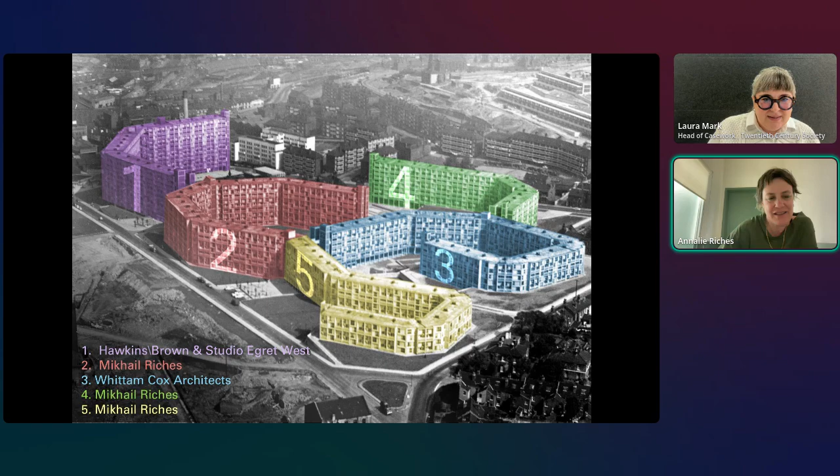So Park Hill Flats was completed in 1961. It was 1,000 homes, I think it's the largest listed building in the UK, or maybe even Europe. And it's been built as a number of phases. Phase 1 by Hawkins Brown and Studio Egret West is very well known and completed, I think it was 2006.

We've done stage 2, which is now finished. Stage 3 by Whittam Cox Architects is student housing. Stage 4 is on site, and stage 5 will hopefully follow. It has planning permission, but with Park Hill, who knows?

It was the first of 4 mega structures that Sheffield City Council built. In a decade, they managed to complete 4,000 homes, and it's the only one that's left. All of them were based on the idea of streets in the sky. So you lift the streets off the ground, and you access either your flat above street or below street, and every single flat is a duplex.

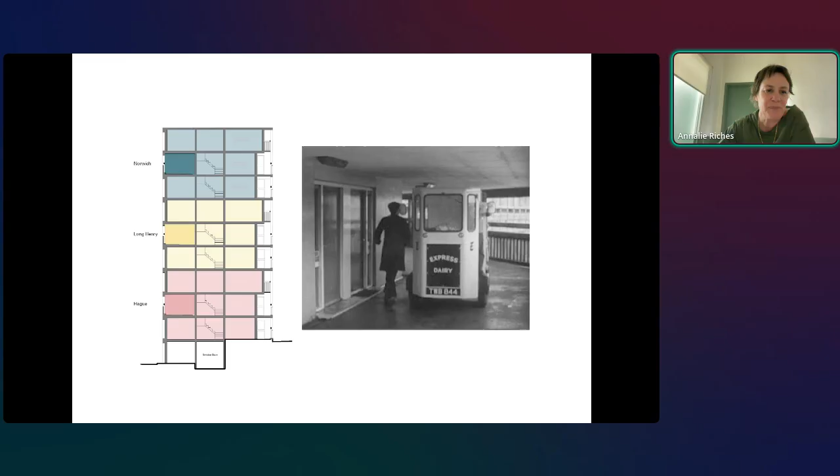They originally, it's quite a British form of brutalism. It's concrete frame with brick infill panels, and the bricks were chosen with an artist and graded in colour up to the sky.

It was hailed a success, much copied, and it remained a success. It had everything you wanted there. It had shops, schools, pubs, a church.

But in the 80s, it started to decline. A lack of maintenance, widespread job losses. There were lots of reasons for its failure, and a lot of people in Sheffield wanted to see it demolished, along with the other 4 projects.

It got listed in 1998, and then Urban Splash won the competition to redevelop it. I probably think they didn't know what they were quite getting into, but it needed a complete facelift, and it needed a new image. And so phase 1 reinvented Park Hill.

It was this shiny new building, and gradually it started filling with new people and businesses. And then when it came to phase 2, they had another competition.

They decided they wanted a lighter touch approach, and they had this really unusual competition in that they gave us the keys to the building, a flat, and told us just to wander around, and then the interviewer's inviting the jury into the flat and showing them what we'd done.

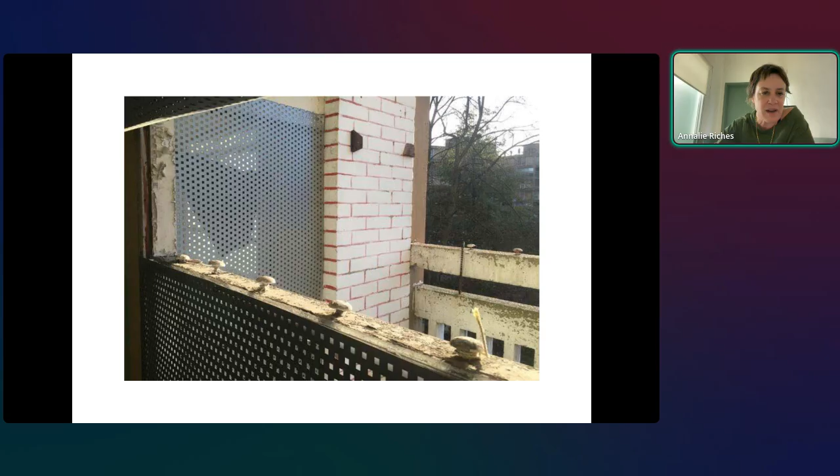And our flat had this white brick where someone had painstakingly painted in all the mortar joints. Another thing we noticed was the bricks were actually in really good condition, which was surprising because the concrete frame was quite severely degraded. And actually it turned out this is because they'd been laid in lime mortar and had been able to move with the building.

So we really wanted to keep the bricks, and actually all we've done is give it a light clean, and we kept the mortar.

We also had the benefits of thermal imaging on phase 1, which showed us where the most problematic cold bridging was, particularly these lateral beams that go into the building. And so if we could insulate those, then we could massively improve the thermal performance.

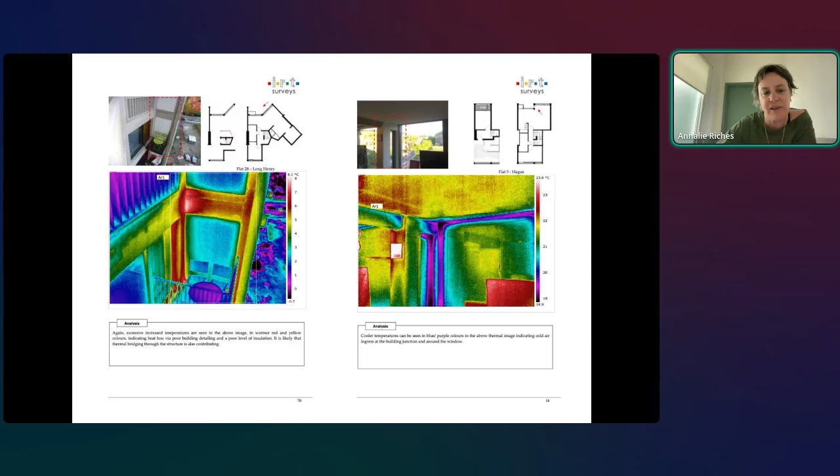And so this led us to develop this idea. We'd keep the bricks on the surface, and we'd insulate and colour these reveals of the flats.

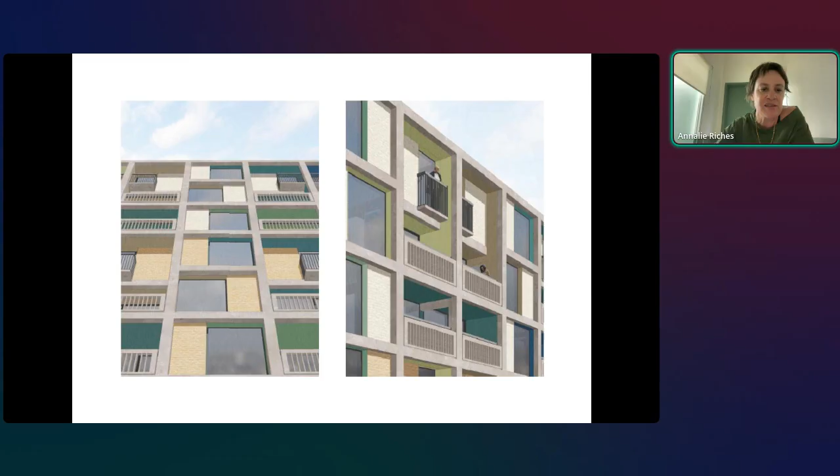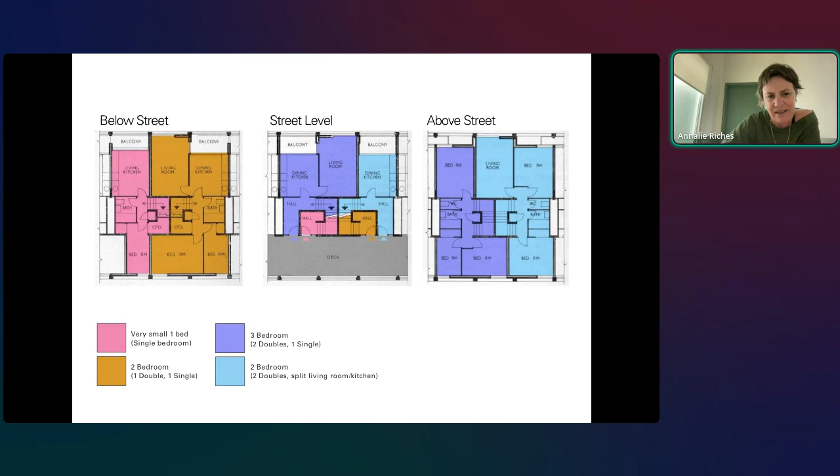We assumed this was a repetitive cluster of flats that would go across the whole building. But when we finally won the competition and got to look at the whole plan, we realized there's no repetitive cluster of flats in this building. It's kind of nuts - there are two different pink flats, and they repeat randomly across the facade. I think this is probably because of the apocryphal story about trying to keep people together as they lifted the flats into the sky, which may perhaps be true, although it's a crazy way to design a building. But I think the strong sense of community there was really important to the architects.

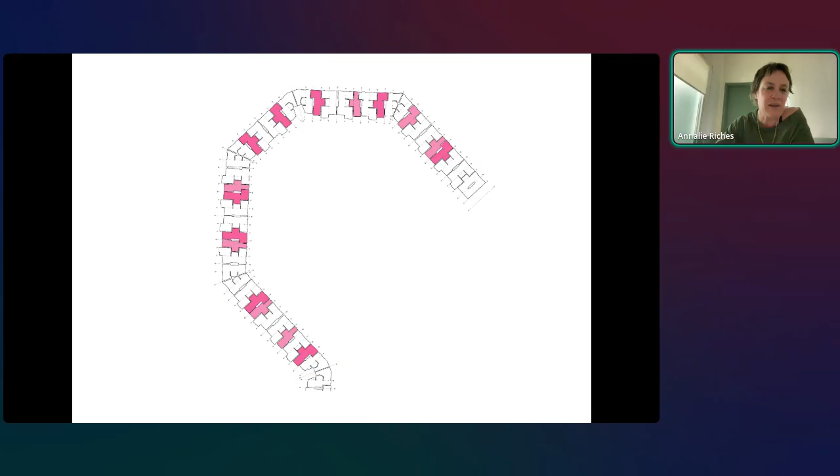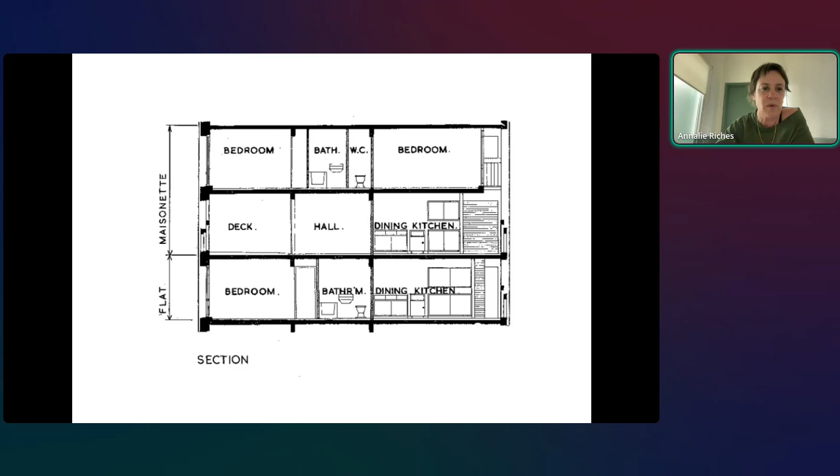It's a tricky building in section because there's very low floor to floor heights - 2515, which is about 0.5 meter less than you'd normally build it. Massive cold bridging. The deck or the street is the biggest problem, but also the facade steps in and out. It's needed a really incremental process to look at where we can add insulation where possible and what compromise we accept in terms of floor to ceiling heights.

The streets are, again, tricky because there's no passive surveillance. They turn blind corners, and we really wanted to improve the feeling of walking along these streets and the sense that there were people living there, which you didn't get. When you look at the old photos, you can see people have customized their thresholds with this lino that everyone put a different lino on.

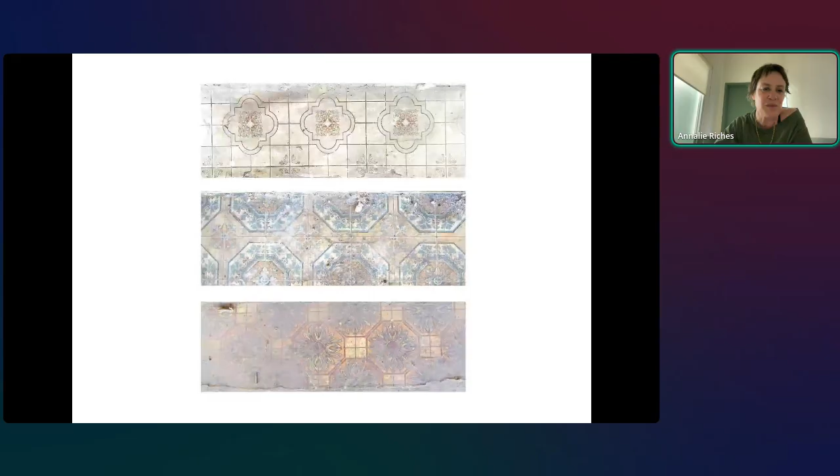And when we looked, they were still there. So we did a lino survey and developed these doormats that we extended a bit further into the street to give people a bit more defensible space, and also to try and discourage people from walking right next to the doors - and at night they're lit.

We really loved phase one, the way they introduced these corner windows to all the below street flats, and people had started to customize them. Apparently one street has a competition for the best Christmas display, and we really wanted to take this idea into phase two and give everyone this space to customize, but also to improve the surveillance onto the street.

So from the outside, this is the street side. The bricks have just had a really simple clean. We've recessed the windows back into the thermal layer to try and give the brick panels the same relevance as the phase one aluminium colored panels.

From the deck side, it looks a bit like our stencil graffiti. From the front, it's kind of cleaned up with new windows. But as you turn the corner, you start to see the different flats within the whole.

The colors on the balcony reveals are reflected in the door colors, and at night these are lit. With the different patterns of the doormats and the door colors, everyone has their own front door - they're all unique.

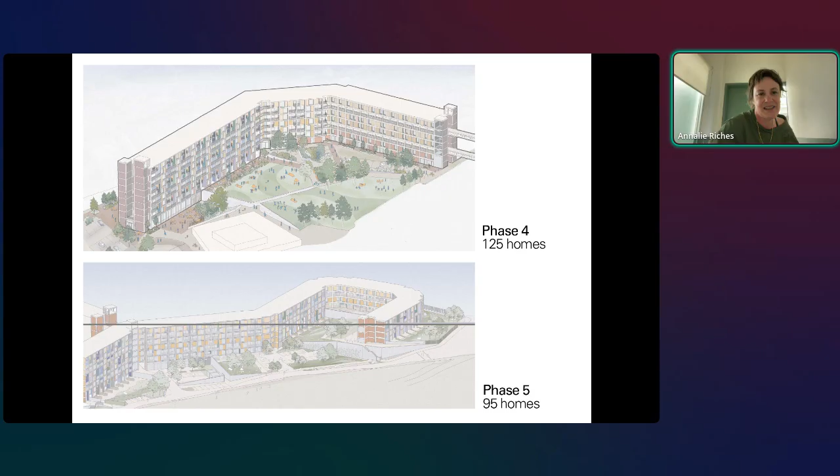In the next phase, phase 4, 125 homes - as I said, it's just started on site. And phase 5 will be a further 95 homes.

I think one of the pleasures of working on a building for a long time is you get to meet the people who live there. There has been quite an extraordinary sense of community that's developed incredibly quickly in phase 2. This offshoot, Concrete Communities, has started to make connections between people that live in these kinds of buildings.

Laura, you're going to tell me I've run out of time? Yep, you guessed it. I was just going to say Park Hill isn't finished. It's 60 years old, hopefully we've had another 60 years. There's still a massive site in the middle, and I sense it's not the end of its story.

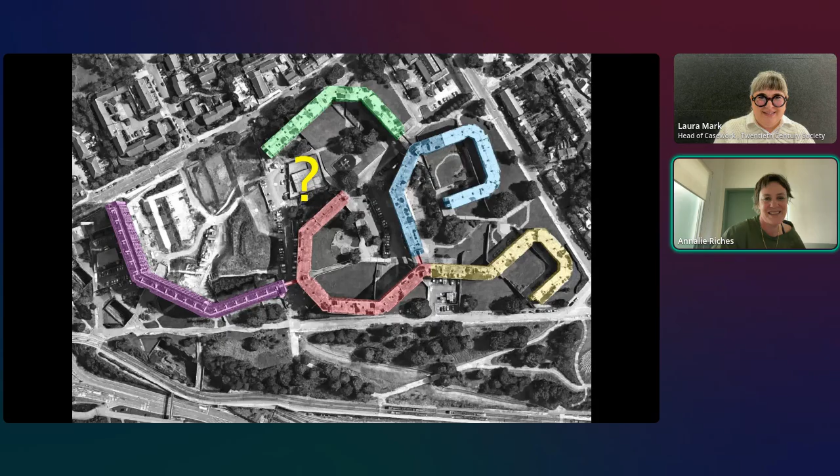Yeah, great. Thanks for a really interesting presentation, Annalie. I love the customization elements. I think that really is Sheffield to a T.

I just wanted to understand, having been part of the tender process, you've lived in the building, whereas I've only visited in the day. So what does it feel like, and how have you worked to make it feel safe approaching what is quite an imposing set of buildings when some are still empty, and how does that work into the phasing and design approach?

Well, we didn't live there. We spent two weeks kind of wandering around, and actually it was built during COVID, which was an absolute nightmare. We had ships stuck in the Suez Canal, I don't know if you remember all that stuff. So our project architect, Alan, went and lived in phase 1 for a month and was on site every day trying to help. It was quite chaotic.

I don't know, I was a student at Sheffield. I've never thought it was a really imposing building. I was indoctrinated to love it. It certainly had, whilst it had its haters, it had people in Sheffield that really did love the building. Yeah, so I don't know, I think it is imposing.

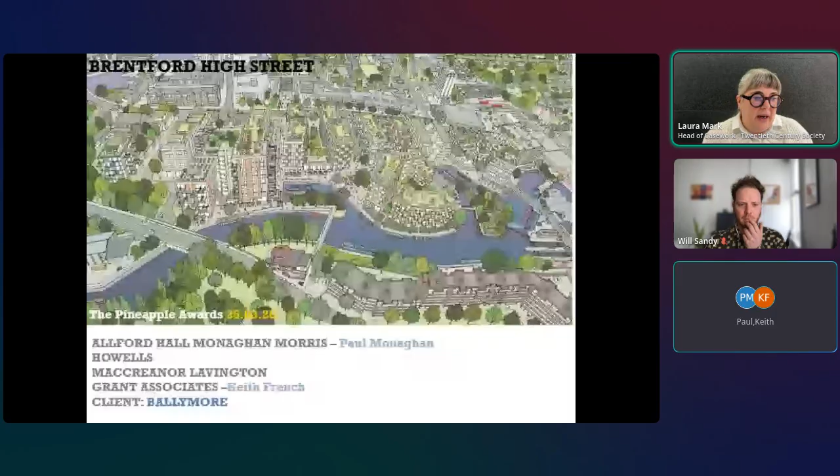So the next project up is the Brentford project in the London Borough of Hounslow for Ballymore, with Allford Hall Monaghan Morris, Howells, Maccreanor Lavington and Grant Associates. This is going to be presented by Paul Monaghan, Executive Director and Head of Design Studio at Allford Hall Monaghan Morris, and also Keith French, Director at Grants.

Thanks, Andrew, do you want me to share that? Sorry, I've got a lot of background noise - I can't hear myself. That's okay, we can hear you. Okay, no, I can't concentrate because there's loads of background noise. Okay, oh, it's gone, alright. Brilliant, you've got 10 minutes then, Paul. Great, thanks a lot, Laura.

What I wanted to say is this is a project that we won in competition as a joint master plan with AHMM, Howells, Maccreanor Lavington and Grant Associates. And we won the project 16 years ago. It took an awfully long time to move on, but this is the aerial view of the overall master plan.

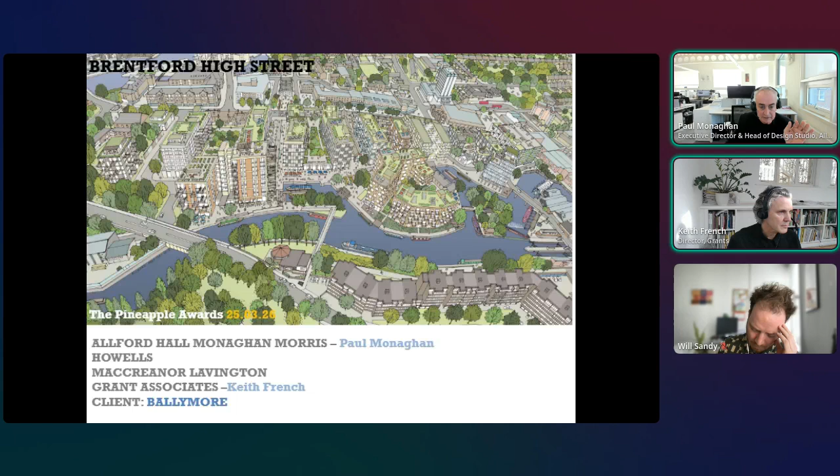The Brentford project is set in the heart of Brentford, just north of Kew Gardens, west of Chelsea. It was a very large site that Ballymore attained, working with Hounslow Council, right on the River Brent - you can see at the bottom - and faced onto the High Street.

Originally, Brentford became quite prosperous because Brentford Dock, a big rail line spur off the main west of England line, came into it, which delivered freight that then went from the dock all the way to the Isle of Dogs. So it was an important town.

But unfortunately, over time it had slightly decayed. People had left the town, and the quality of public space and the urban realm was not quite as strong as it was, and that included all the way through into the river itself.

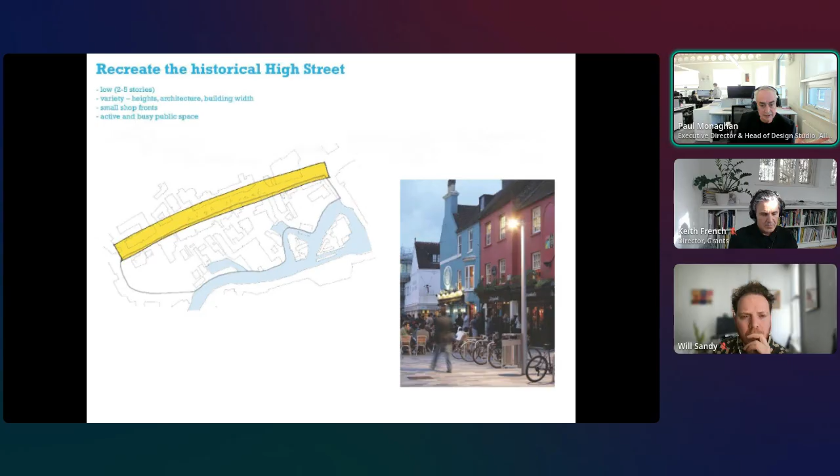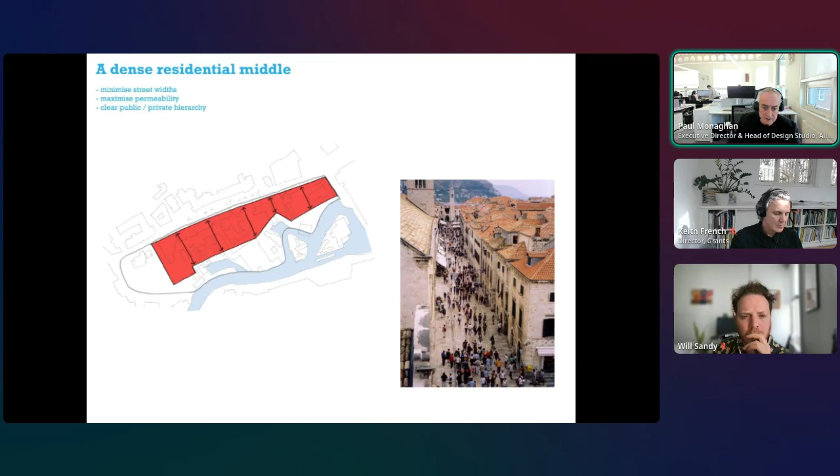The idea of a middle high density, but mid-rise apartments where we were pushing dimensions of streets to make them narrower, to give them more character. In a way, what this actually did was recreate the old yards that used to go from the high street to the river in Victorian times.

And then finally, obviously, recreating the historical waterfront. It had fantastic ecology there, but no one could get to it.

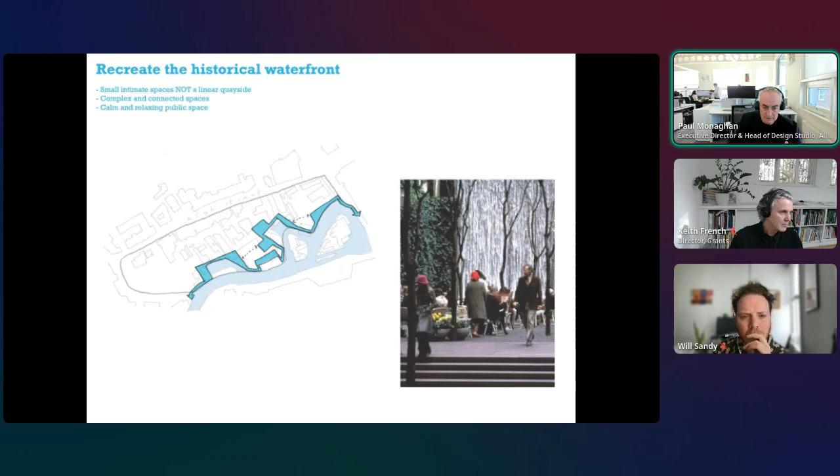We then divided it into plots. You can see some of the older lanes and some of the yards, and we've tried to make the scheme as permeable as possible. This is then the master plan that we got planning for in 2015.

You can see all the different plots. Each architect designed one of the plots, some in outline, some in full. Again, you can see the permeability.

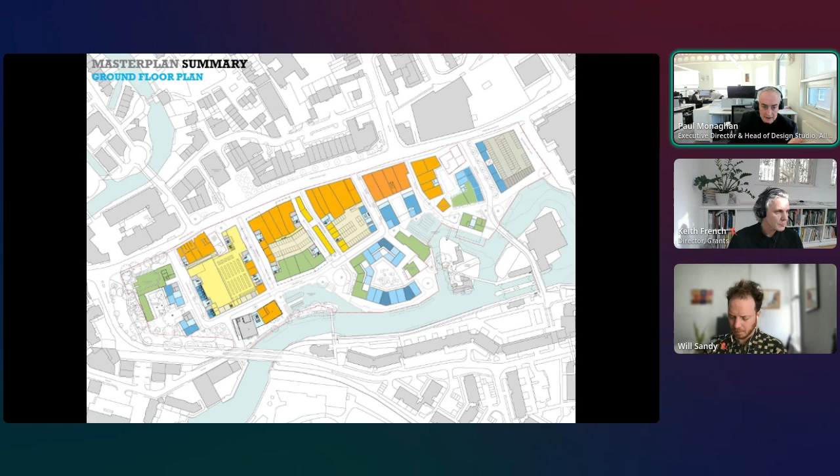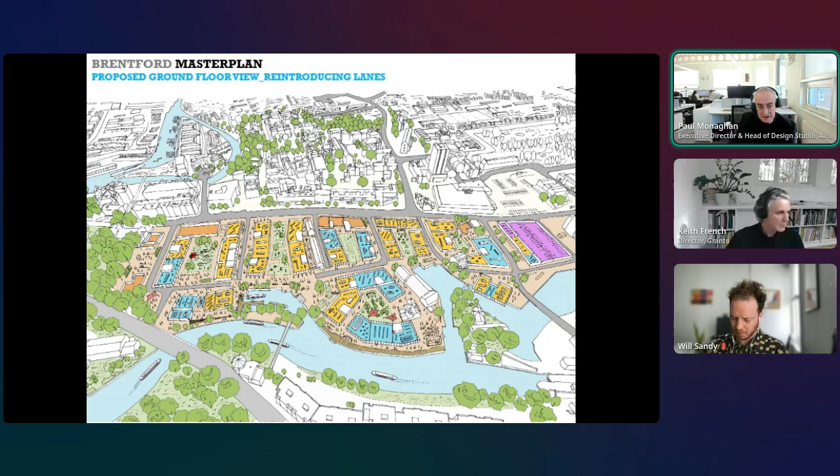As I mentioned, all of this was based on the public realm, so making it totally permeable, with very, very few roads within the scheme. Any roads we did have would be very much shared surfaces and only open at certain times. That's the plan, but Keith will talk about that later.

Working with Grants was a key part of it. That was the key offer to the public, I think. And then very simple buildings, sort of finger buildings going north-south with larger courtyards in between them.

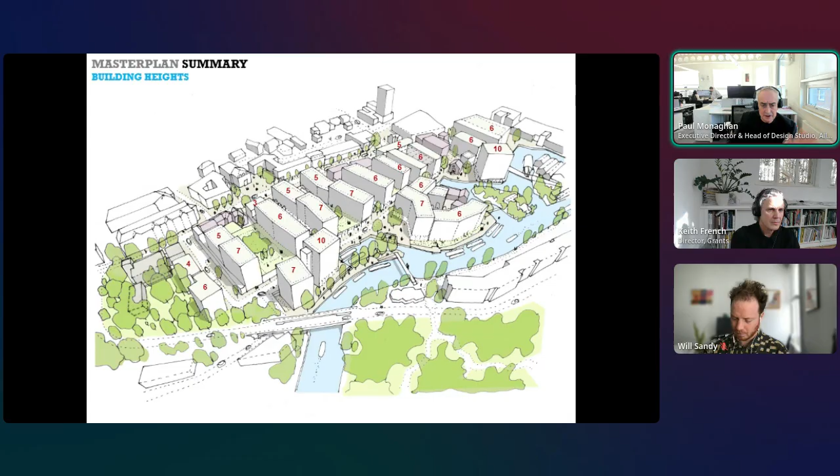And then actually, just two moments of height of 10 stories on the riverfront, but mostly lower at High Street, and then just stepping up a little bit to 7 stories, etc., into the main buildings.

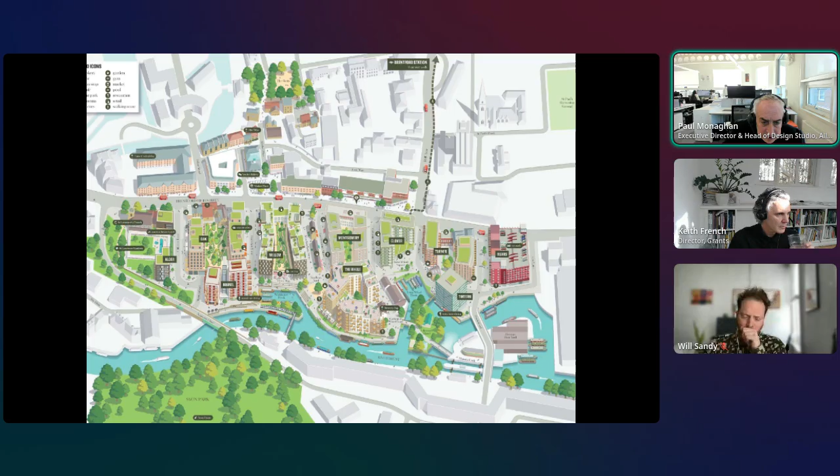And then finally there was a car park that was one of the first things to do with displaced car parking spaces on the site, and that's like a gateway building we did about 8 years ago.

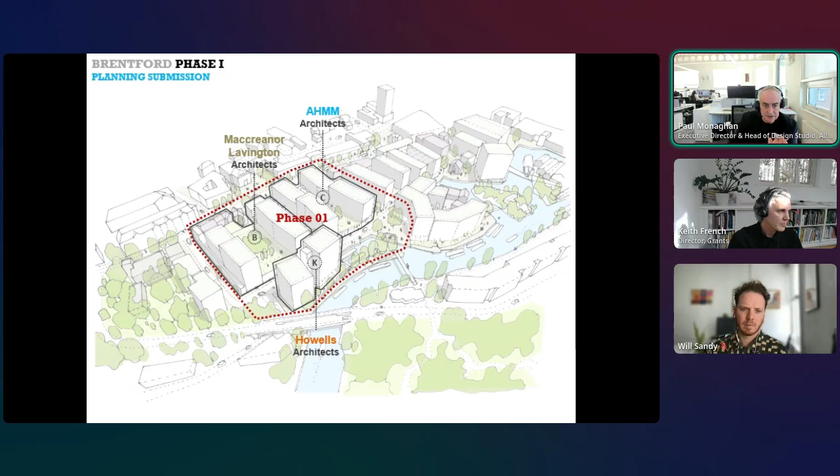But then I'm really going to talk today about phase 1, which is done by Howells, Maccreanor Lavington, and us. This is the plan of the building. I'm going to talk to you about that a little bit later, and then the upper levels with the deck levels and the communal areas, and then the model we made in 2014.

If I can just go to the next one.

So if I start with the Maccreanor Lavington building, which was a sort of London stock brick, which very much took its cue from the...

Sorry, Keith, I think it's your office actually. Sorry, it's really noisy here. That's brilliant, thank you. Everyone can hear me still?

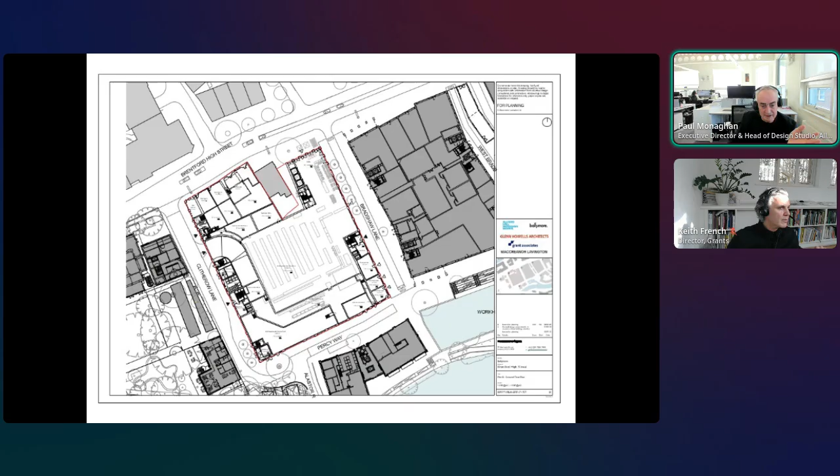Maccreanor Lavington took the thing from the industrial nature of the site, and I think all of us took to a certain element. The difficult thing they had to deal with was a large supermarket at the bottom, a Morrison's. They did this by creating a pavilion as an entrance, almost like a civic building, which addresses the magistrate courts beyond, and then just simple units above with this very large courtyard.

All the way down one of the yards, you can see it's lined with small units, and the same as it goes around the base of the building. It also steps back because at times that yard is quite narrow. And then inside, a very generous courtyard for all the residents.

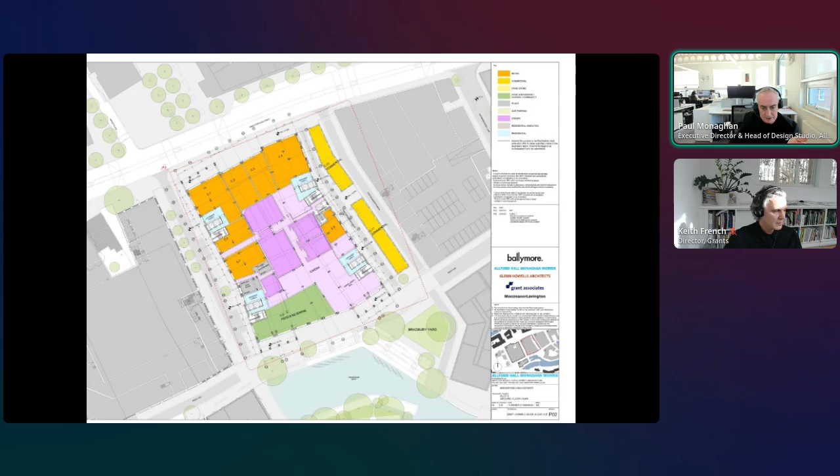That was very important to us, and was a bit of a struggle with the council at first, but it certainly feels like it's worked.

On the other side of the lanes is an old building that we refurbished, and in that case it's a Gail's, but actually the only chains on the site are Gail's and Everyman. All the others are local businesses who Ballymore worked with to try and bring in local expertise.

Ballymore are known for putting a lot of effort into their apartments. Finally, we go to Howells building.

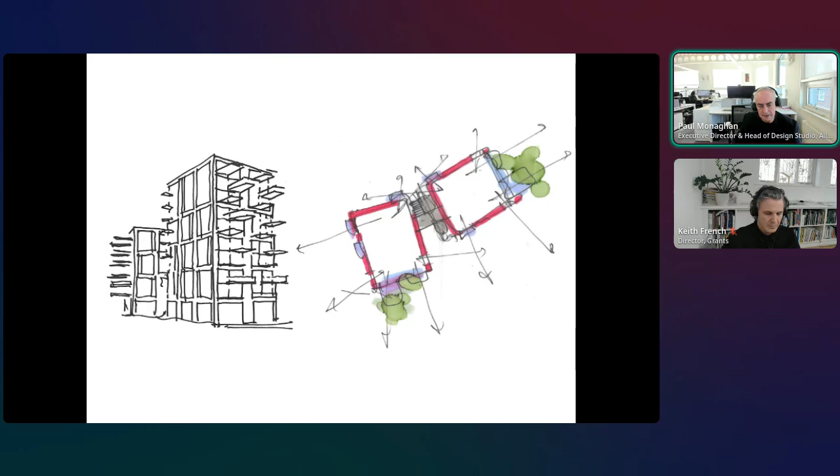This building was on the kink of the river, so it was really important that it sort of twisted. It's a very simple plan with an awful lot of dual aspect units, with the core in the middle being actually open to the air.

I think, again, the very, very large balconies are one of the main features onto the dock here, and were a key part of the sales in terms of the building. So they worked incredibly well.

At the ground floor of that building is a local restaurant by someone who had a restaurant elsewhere in the town. Ballymore helped to set it up, and it's become a real heart of this neighbourhood now.

As Paul mentioned, one of the key ambitions for the Brentford project was to open up and reconnect the town with its waterfront.

This is Workhouse Dock, transformed from this hidden edge and concealed space into a new destination for the town and indeed London. A space now that invites people to spend time, to engage with the water, and just to enjoy.

The River Brent is tidal, and the terracing helps manage access. It helps with flood mitigation, and is a flexible space for events, not only for the town, but also for the canal side community as well.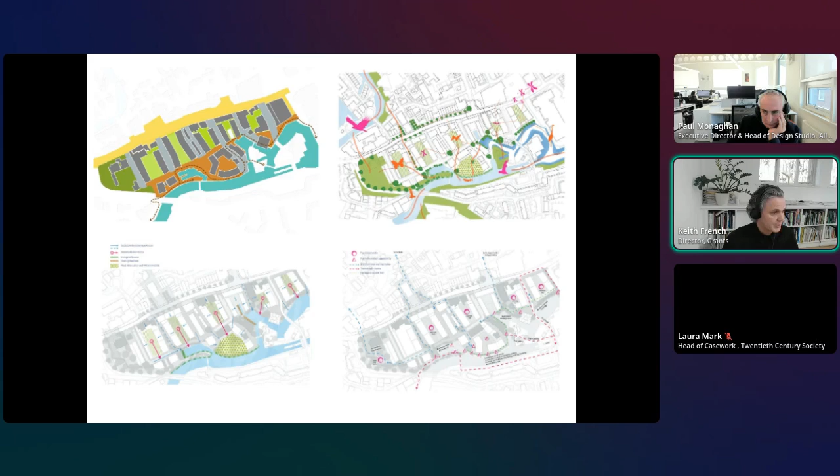The next slide shows that connectivity and movement were key themes and threads that ran through the whole place, not only linking the high street by interpreting the traditional lanes and yards, but also creating stepping stones for ecology and helping to bring back biodiversity and restoring the original Thames pathway.

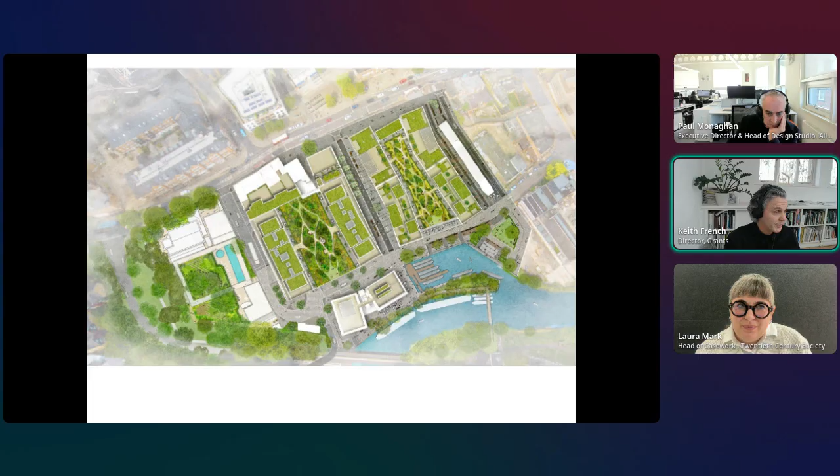The next slide just starts to show that multi-layered approach to the greening, creating this significant piece of multi-layered green infrastructure and urban realm to help bring ecology back into the town.

I think the Brentford project has brought life back to the waterfront. It's become an amazing destination for waterside activities, for areas to spend and socialize, but also life after dark. So thinking carefully about the after dark experience, not only in terms of safety and events, but also the ecology and the Bat superhighway that runs along the Brent and the Thames.

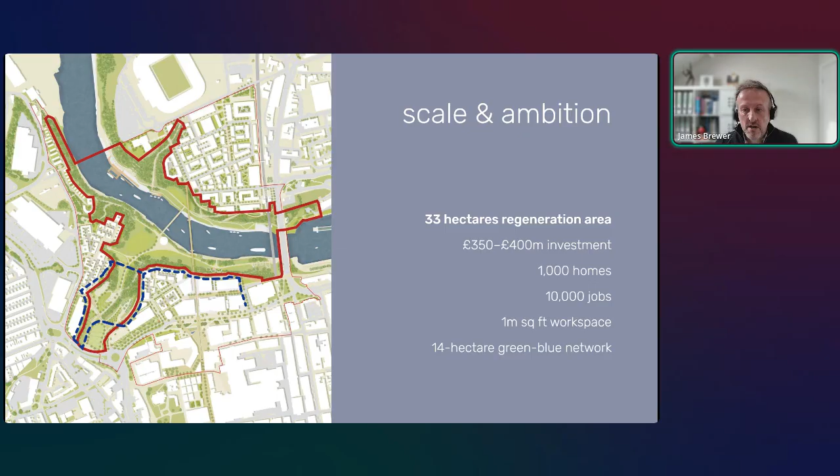To put this into context, it's important to look at scale and ambition. It's a 33-hectare regeneration area. It secured 350 to 400 million pounds of investment from both public and private sectors. It's creating 1,000 homes within the city centre, providing over 1 million square feet of workspace, which in turn creates 10,000 jobs for the local community. I think what makes this different is it's all centred upon this 14-hectare green-blue urban network. Here, the landscape isn't seen simply as an inconvenience or taking up development area or filling development gaps - it's providing a core structure that's then unlocking the city's development ambitions.

Looking back historically, it is an industrial waterfront. It's had the Vaux Brewery on site, before that the shipbuilding and coal mining industries. As with many of these urban industrial riverside settings, it's ended up fragmenting and disconnecting from the river to the city. So it's not simply about redevelopment - we feel it's about civic repair, and the park is providing Sunderland's centrepiece and a new civic centre, one that reconnects the city both physically and symbolically to the river, and importantly connects communities both north and south of the river to get over the divide.

So it's focused on the park, forming this green-blue spine. It's a landscape-led framework, and as challenging as it is dramatic, it's got these incredible limestone cliff edges. It's showing many industrial scars, remnants of the historical wooded gill, but they all combine to create this really unique and distinctive urban landscape. Together, collectively, this defines travel movement, defines ecology, defines where development can take place to create a unified new neighbourhood.

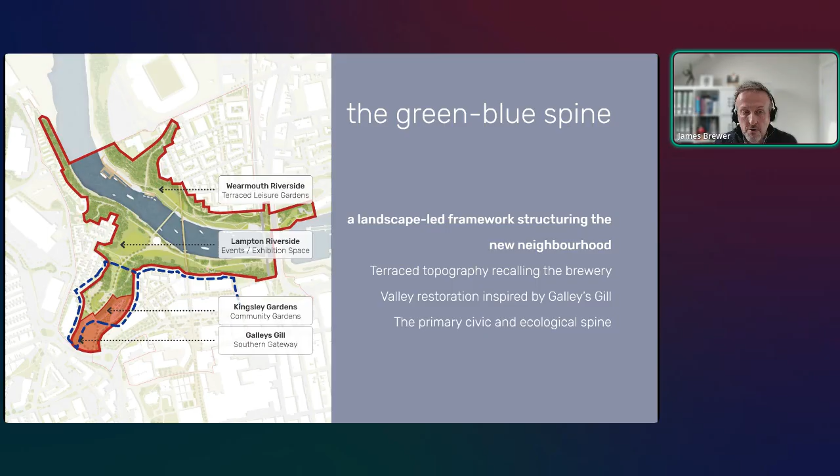Important to this is movement and re-establishing connections across the river gorge. The Keel Crossing just opened at the end of last year, spanning the Wear Gorge, 250 metres in length and about 10 metres wide. Importantly, it's car-free, and it's already reshaping movement patterns, joining communities to the north and south of the river.

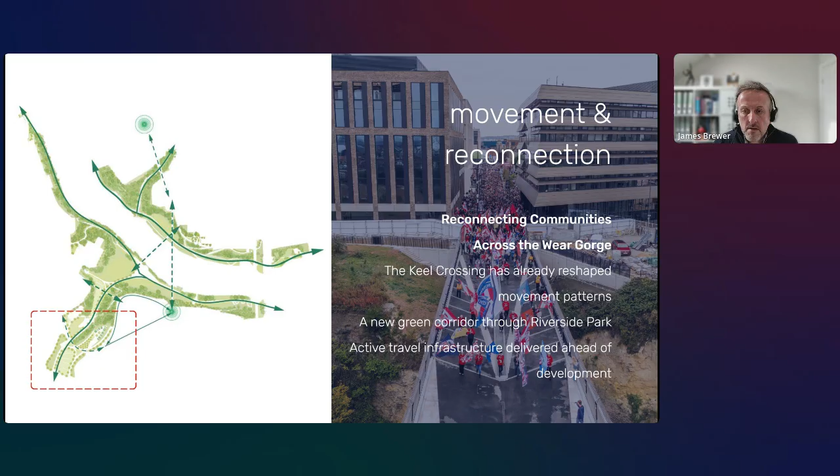Now, it's not just about movement, it is about climate resilience, and the climate strategy is embedded from the outset. Core to the Southern Gateway that is currently on site are these sustainable open water terraces, designed to take the majority, if not all, of the surface water runoff from all the neighbouring developments and the highway through a series of water terraces and water gardens to slow water flow and cleanse the water before it enters the Wear. We've planted 88 climate resilient trees within this first phase, the Southern Gateway.

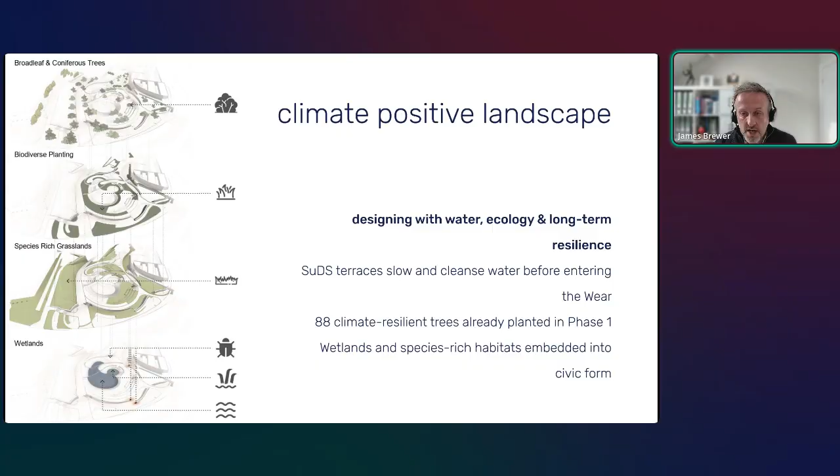We've also embedded wetlands and species-rich habitats within the civic forms of the park, the sinuous forms that we've developed, along with integrating habitats and insect hotels within the ribbon walls. So it's all integrated - it's important that the environmental infrastructure is intentionally not hidden. It's all part of the experience for the community.

Recently, they've hosted the Women's World Rugby in the city. All this is bringing community groups on board, businesses on board, and showing national and international interest from other investors as well. And it's clearly working - you can obviously tell from my accent, I'm not a local. I've lived in the region for over 30 years, but there's definitely a sense of renewed pride and passion in the city. You can really feel the energy.

Of course, football successes help, but with a change that people can see, it's moved from the multitude of feasibility studies that have failed in the past to something that is actually being delivered that people can see, and it's already building momentum.

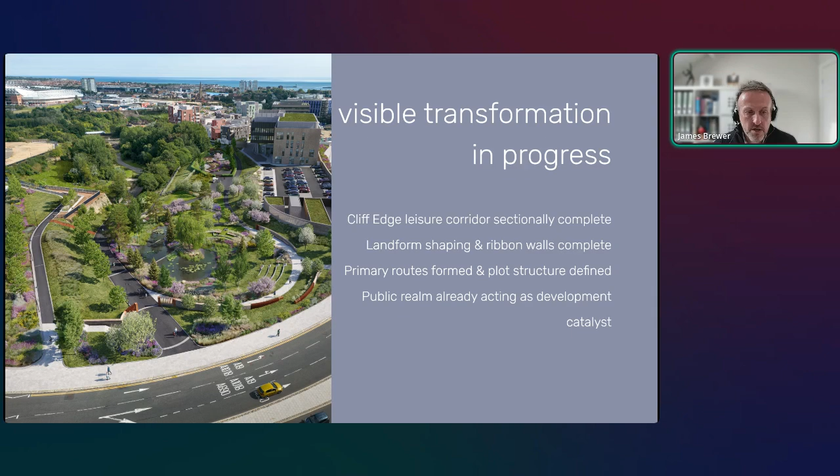As a practice, we certainly believe quality matters. It is a civic environment. Materials need to be robust, they need to be relevant. There's echoes of its history in there in a contemporary way. Natural materials as well, biodiverse planting, climate resilient planting, and so forth.

In material selection, detailing, plant selection, and these crafted edges, they all signal permanence and ambition. They build confidence, and it certainly doesn't feel temporary, but intentional.

As with any of these large developments, they all rely on governance. As Laura said at the start, regeneration's led by Sunderland City Council, where landscape, transport, ecology and development are all integrated under one coordinated vision.

The landscape infrastructure is helping to unlock future homes, businesses and employment, and it's providing long-term stewardship, biodiversity, safety and maintenance. They're all embedded in the way the design's developed and how the surrounding developments can help ensure long-term stewardship exists in the future.

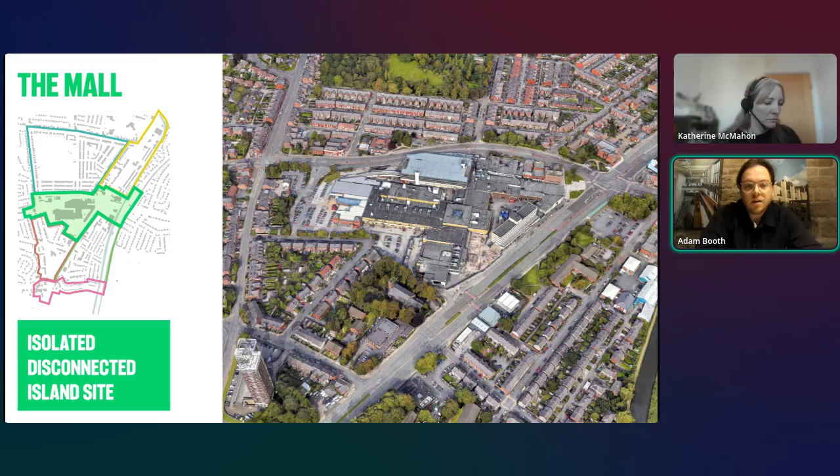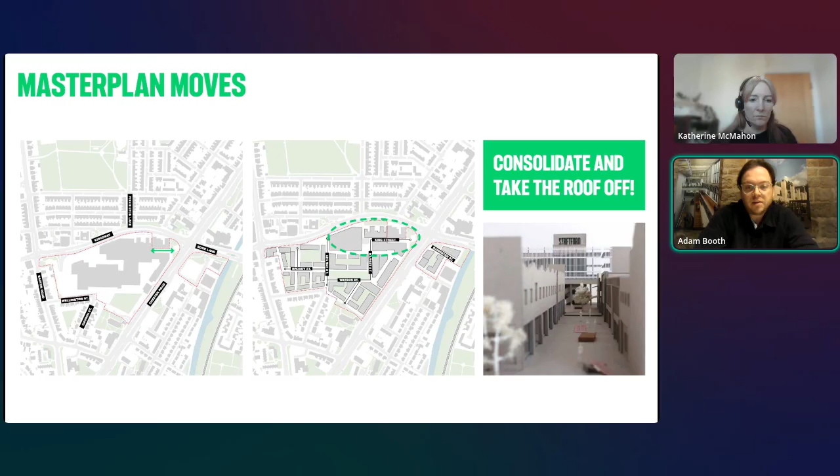So we set about consolidating the retail that was there and the opportunity for future retail and experiences towards this King Street set of spaces, unlocked by removal of that roof. They pivoted around connectivity north, south, east, west to all the surrounding neighbourhoods and culminated in a town square, which we felt could be the heart of this new high street with nighttime economy.

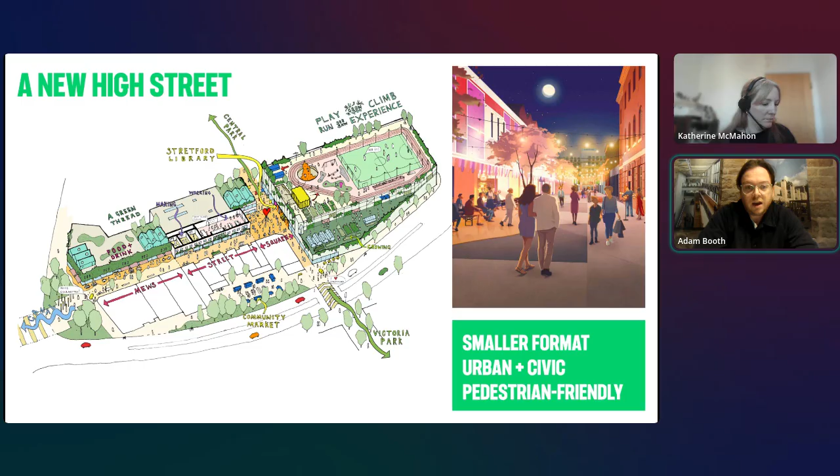We felt what was there before was more in keeping with modern trends of retail and town centres - a place where you can live, work, shop, meet, and experience a true 9 to 5 into nighttime economy of community engagement. King Street was the first phase of that, and how we did that, Katherine's going to explain now.

Yeah, thanks, Adam. So the decision to remove the roof really reframed the way we looked at the scheme and made it more a story about retention and reuse of existing buildings.

We took the roof off the spine of the mall in the central atrium, which revealed 3 buildings that were pretty much left intact. The strategy was then to upgrade the facades with internal insulation, retain as much as possible, retrofit shop fronts with improved U values and thermal efficiency, and only add to what was there in key moments to enhance the scheme intentionally.

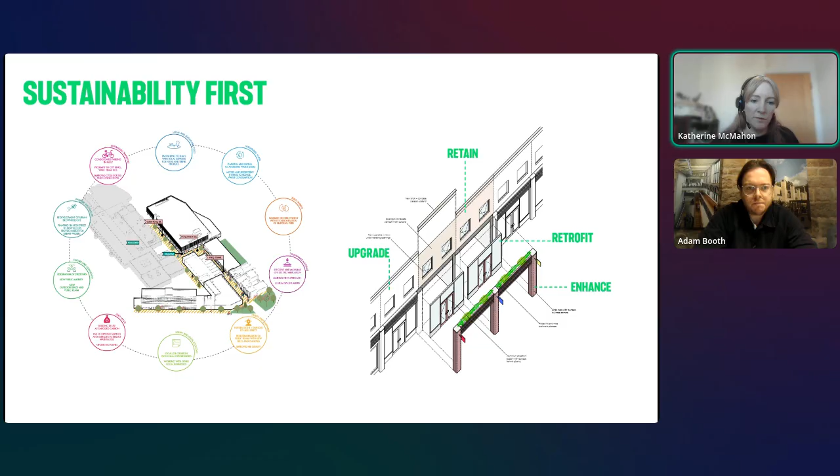We collaborated with another architectural practice, Studio Mutt, who have experience in exhibition and shopfront design, and we studied the character of these existing buildings to look at how we could frame them, put them on display, but also overlay a more modern, current Stretford aesthetic using cues taken from the surrounding architecture and Stretford's history.

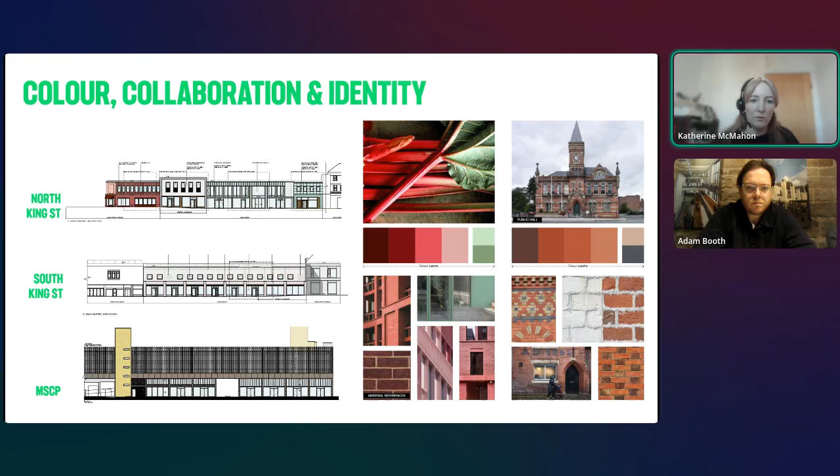It became more and more apparent that although we wanted to add an identity to these buildings, the scheme became more about the spaces between the buildings - reinstating King Street, as Adam mentioned, and creating connections to the north and south of the site.

And the following slides are just a series of before and after pictures, which hopefully really demonstrate the impact of removing that mall roof and creating new public spaces.

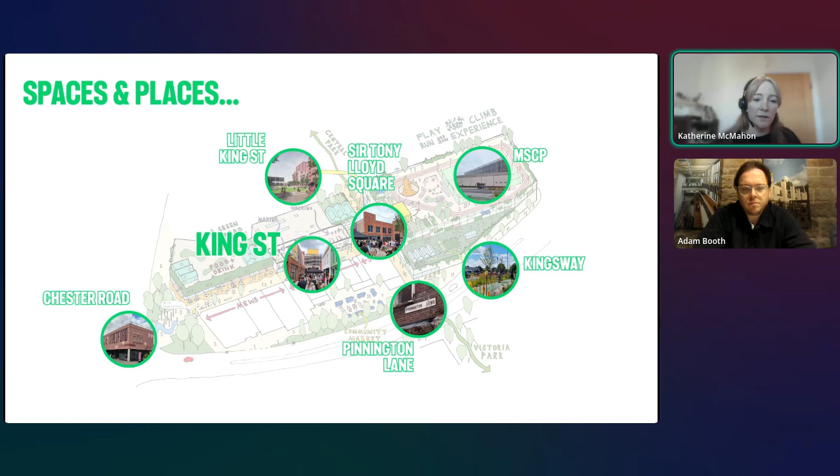At the heart of the scheme is a new public square, Sir Tony Lloyd Square, which really anchors the development. There are a few key civic moves and gestures here.

We've incorporated a town clock and increased the scale of some of the retail units, so as well as providing a space for the community to gather, it's a space that can draw some of the more destination retail and leisure uses. Proof of concept there is one of the tenants currently occupying one of these units.

It's an independent cinema, which will hopefully provide activity that spills out onto the square and activates it from during the day through to the night. It's also a nice nod back to the Picturedrome, which was previously on the site, which attracted footfall and activity through the site historically.

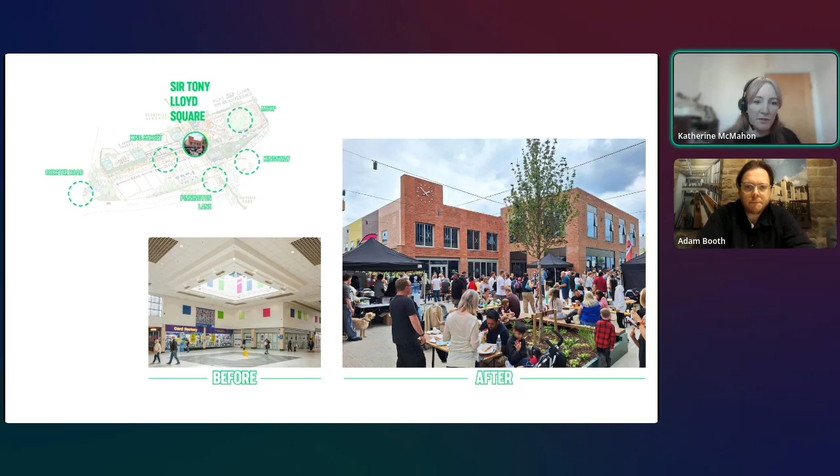Connections to Stretford and existing neighbourhoods: we've got Pinnington Lane here, which was previously almost a back-of-house entrance through a service yard, now opened up as a key north-south access through the site and beyond to the wider master plan.

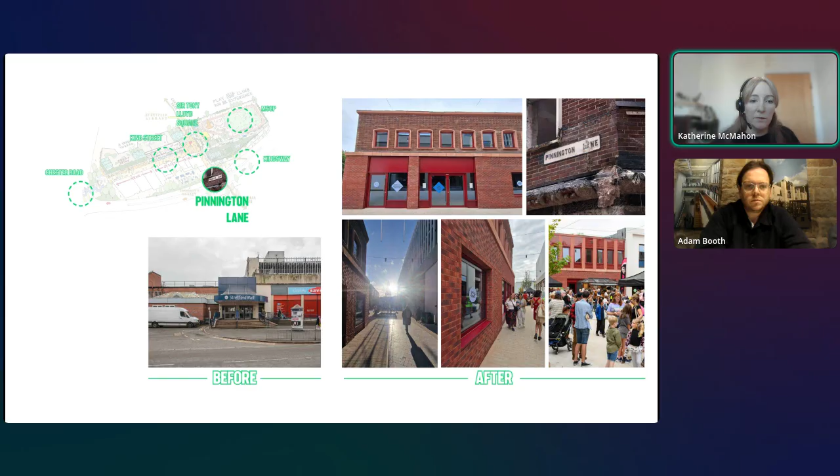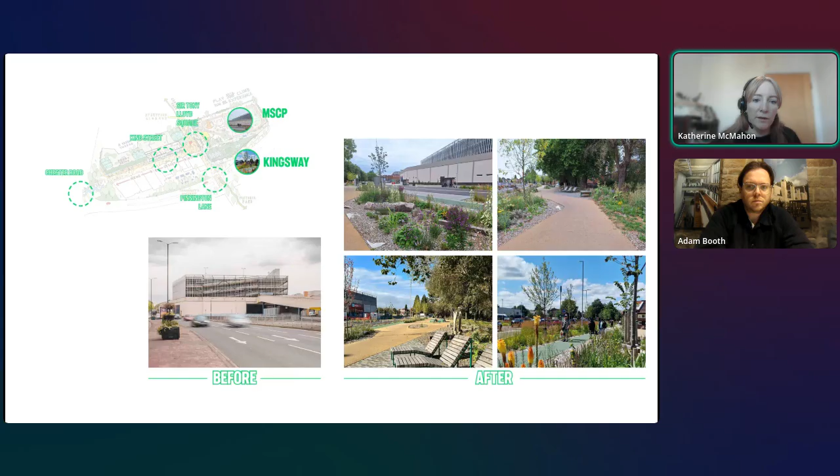We made some light-touch interventions to the MSCP car park to allow future retail tenants to occupy the ground floor around the perimeter of the site, and to connect into the previously completed Kingsway scheme, which improved walking and cycling routes and greened up that Kingsway perimeter of the site.

Bruntwood and the JV made a really bold decision, I think, to open up the street to the community before any of the retailers were actually in situ.

They hosted a well-named King Street street-warming party, which was really well attended. It signalled that these spaces were designed for the community, for them to activate and to shape. It also gave Bruntwood the time needed to allow retail occupancy to develop more organically, attracting the right retailers for the town.

It's also given Bruntwood the opportunity to bring in more interesting creative uses to these spaces with early tenancies and meanwhile uses. So we've now got podcast studios in Stretford, a community radio station, and art battles going on in the existing mall.

There's also an opportunity to use and activate some of these retail units with community uses. Bruntwood has been heavily involved with local community groups - a couple are highlighted here, including Stretford Stride, a female collective of artists who have curated free arts and crafts events for residents, which occupy the spaces but also spill out into and activate the streets, squares, and retained areas of the mall.

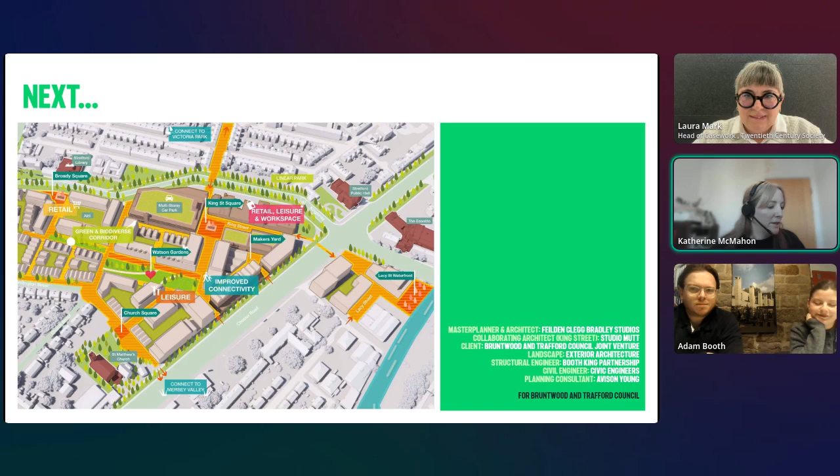Abby from Bruntwood can maybe give us some more - she's gathered some quantitative data on the impact of that community engagement and will be with us for the Q&A. Just to finish on that slide, the King Street phase is hopefully the first step towards completion of the wider master plan to create a greener, safer, thriving neighbourhood in Stretford Town Centre.

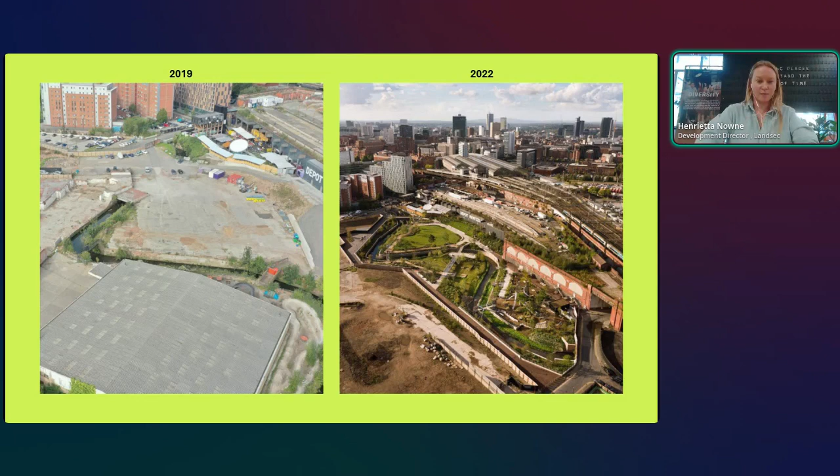So that's how the park was delivered. The picture on the left is 2019, and the picture on the right is what it looked like when we finished the park in 2022.

So now the phase one, which is what we're here to talk about today. There's a big piece of work that's now on site, linked with our first office building designed by Morris & Co, the Republic, which is on site now with Bowmer and Kirkland. And also a separate big infrastructure package being delivered at the moment, which is the pedestrianisation of the route from the station to the park.

And again, from the success of the park, it's really pushed that brief so that the park grows out of the space, and the park will be formed actually linking right up to the station. So as you leave the station to the left, you feel like you're part of the park.

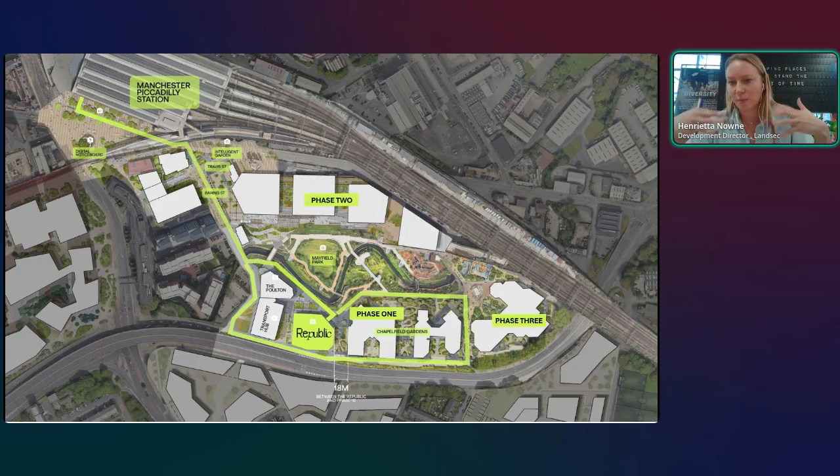And again, it's been an interesting one for design. We originally had the first phase, the first couple of buildings designed, and we went back and changed those once we saw the success of the park and how it was used, which led to an SRF change from where originally it was a park in the centre with buildings around it - we've taken that out. So it's a park that wraps around the buildings, and even the interior design of the buildings is intentionally designed to be an inside-outside space, with an intentionally blurred line between what's inside and outside.

So the phase one that we're talking about today, in the context of the wider master plan, is the Poulton, the Republic and the Transport Hub, which is the same as a mobility hub, and then the first residential phase of 900 homes designed by Studio Egret West and Shed KM.

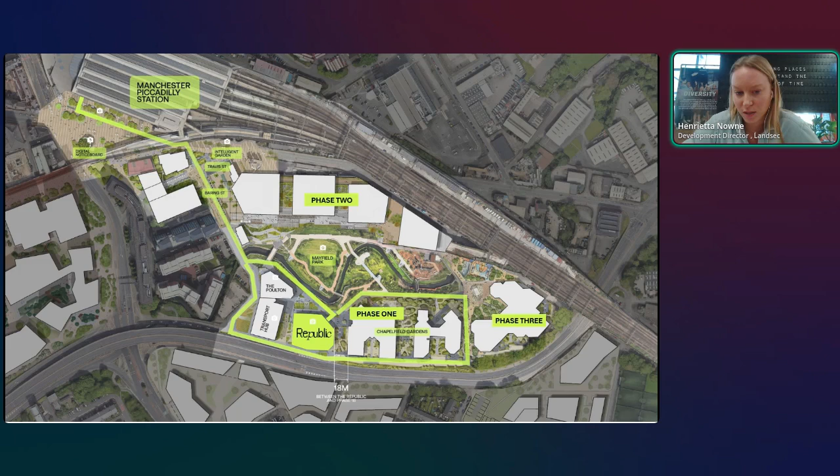In social value terms, what we've delivered so far at Mayfield has far exceeded what we ever expected. We've always placed social value at the heart of what we're doing at Mayfield. Back in 2017, we all agreed to an objective that this needs to be a place for all. We hold ourselves accountable to that and constantly test our thinking: is this still a place for all? How do you make sure everyone, from Manchester or not, feels at home and welcomed in our place?

In summer 2024, in a true Manchester way, in July we had a very rainy day for our start on site event that meant we had to quickly change plans. But this was the milestone of starting on site with the Republic, with a big party local to Manchester. It's taken a lot of people to get to this point of having the park and the depot operating the way they are, to then have the first big office building being built speculatively on site.

And then this creates a new front door, with the infrastructure package now on site. I don't think we would have done it to this scale if we hadn't made the conscious decision to deliver the park first and see how people use it. That's informed things like this new front door and led to really interesting conversations you can't have until you're in progress.

We were approached by Microsoft, who were launching the Intelligent Garden at the RHS Chelsea Flower Show last year. The gardener they used, Tom Massey, had used Mayfield Park as his design inspiration because of its strong story of reclamation. So we were kindly gifted this garden, which is now being put in place as part of the pedestrianisation works on site. It's the first time there's been technology that taps into the trees to tell us, from an estate perspective, what they need to not only survive but thrive in a very urban environment.

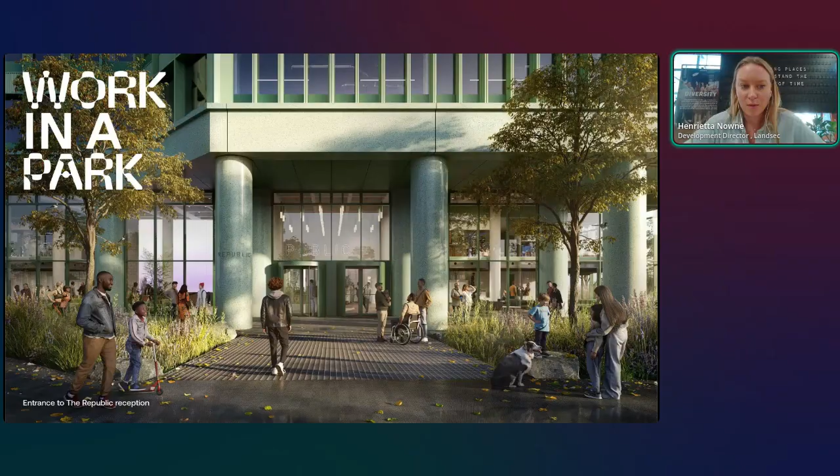So now we're launching our work in a park with the first office building you can see there. This is the Morris & Co building, built to the best sustainability criteria you can deliver for a new office building. That's on site now.

Shortly followed by the Poulton starting on site this year, and also the Transport Hub, which delivers much needed car parking spaces and an enhanced cycling hub. It's also got a mixture of a cycle cafe as part of it, and lots of additional things you need in the estate like Amazon lockers. We've consolidated those services into one building, which has meant we've been able to optimize all the other ground floor spaces to be open to the public and be an extension of the park — the Poulton, the Transport Hub, the Bike Cafe.

And then the first homes — I'm conscious of not having any time left, but this is the first home, 900 homes here, designed by Studio Egret West and Shed KM, where we got unanimous approval at Planning Committee last summer and are well into the detailed design and procurement process now for a start on site next year.

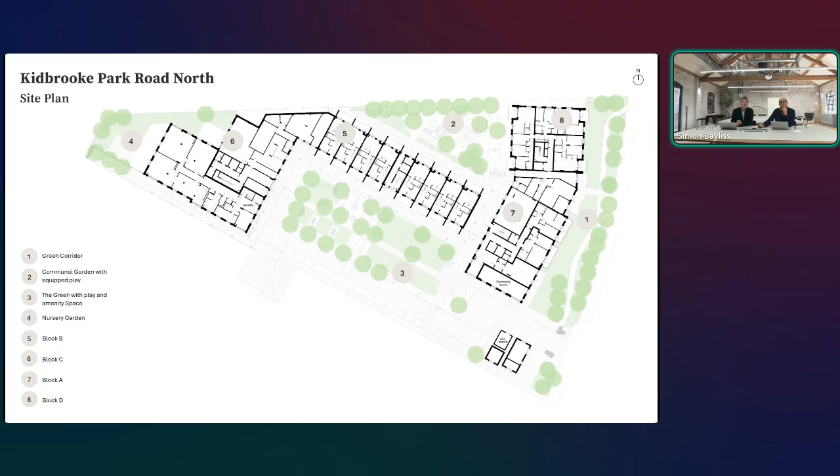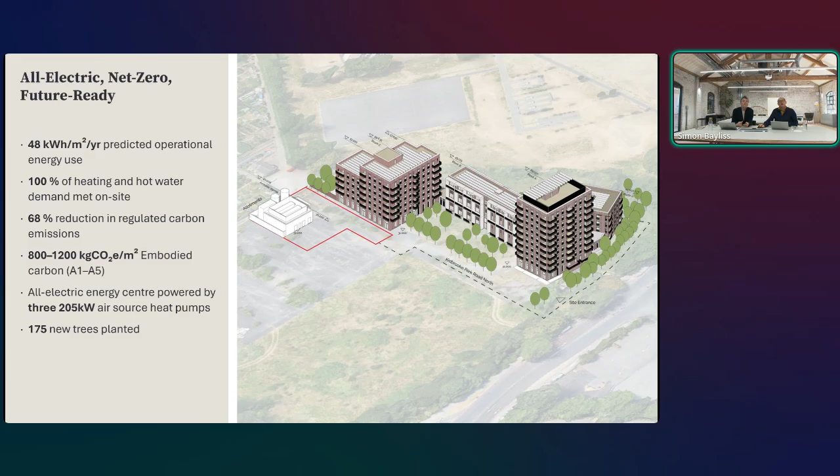You can see some of the stats on the left-hand side - 100% of heating and hot water demand is met on site, and we've got a 68% reduction in regulated carbon, some impressive statistics for delivery. That's all being tested in post-occupancy evaluation - there's been a few teething problems, but we're beginning to get some good data from there.

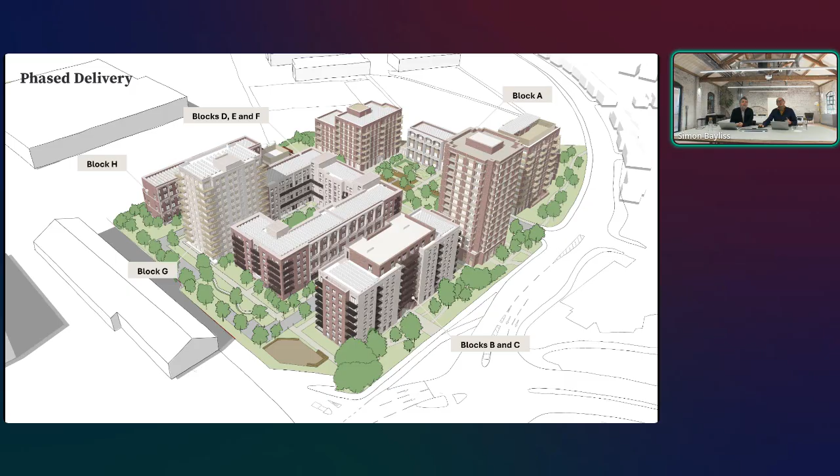And then that just puts the whole site into context with the south phase and the taller element of the entrance, coordinating a similar range of motifs and architectural approaches to deliver the whole scheme.

We were in lockdown fairly soon after we started the project, so there were no residents on site, but we did an online engagement process with local residents and surrounding stakeholders, and in particular the Thomas Tallis School. We worked with the students who came into our studio once we came out of lockdown, and we worked on a whole set of hoardings in commemoration of Stephen Lawrence, who was murdered not too far from the site, and many of the students got engaged in that process, co-designed with us.

Just on the architectural strategy, as I mentioned already, about simplifying down to quite repetitive components - a very simple architectural approach around vertical emphasis, large openings, and shading to minimise overheating.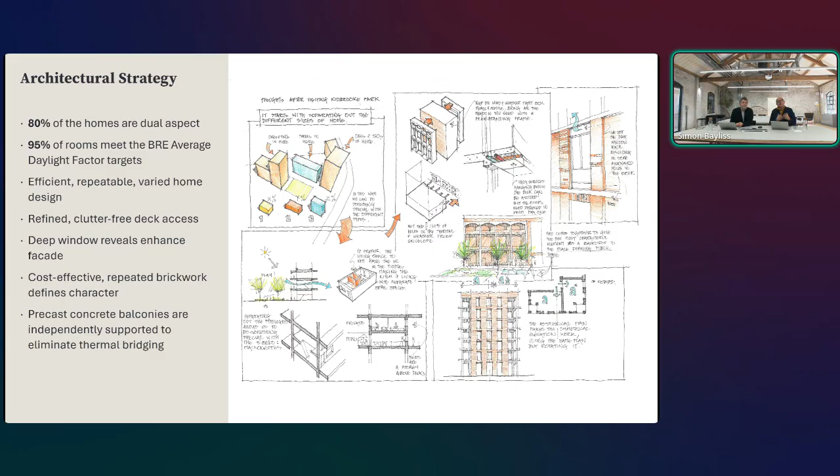80% of the homes are dual aspect. Of course, we achieve that through the maisonettes, the deck access blocks, and a lot of corner flats. We have very good levels of daylight, but we've got very efficient, repeatable and varied housing design, which is used across both phases. You can see that approach to repetition and those standard components.

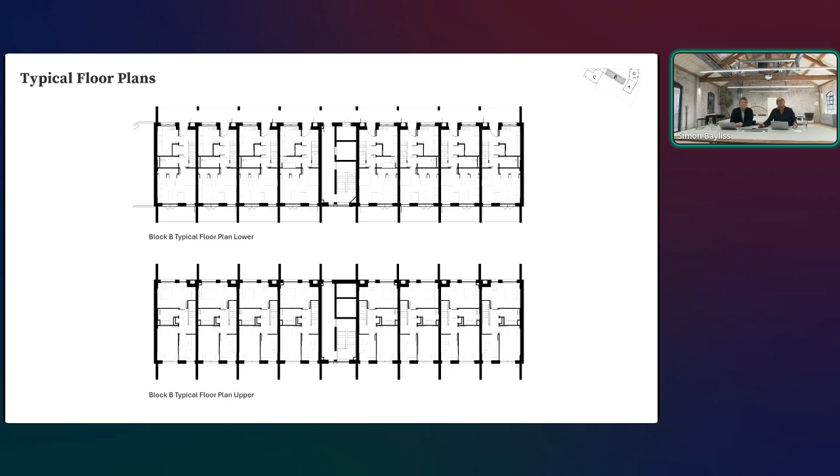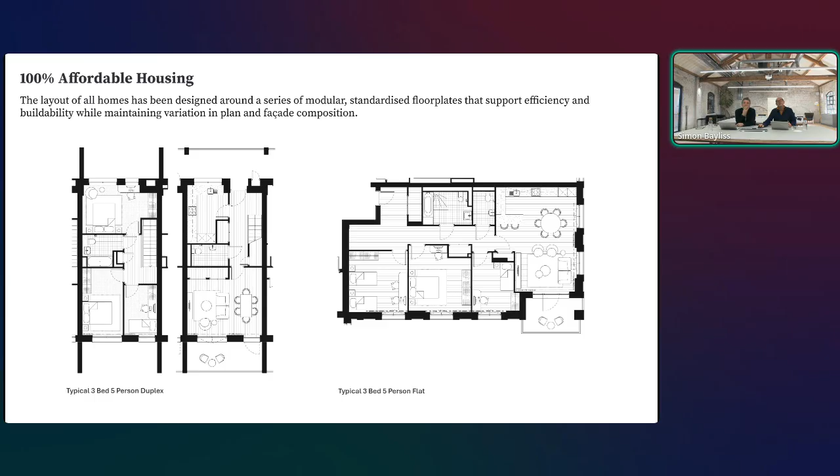Houses designed to be as effective as possible to deliver the accommodation in the very best way, with generous rooms in every apartment type. If we look in a little more detail, you can see the configuration of the maisonette blocks on the left-hand side, repeated across all the maisonette blocks on both the north and south. And an example of a 3-bedroom 5-person flat apartment on the right-hand side with that corner balcony and dual aspect across, with fantastic views across the site.

We did look originally at a modular approach, but it was felt in the end, from the council's point of view for procurement, it would be sensible to deliver a more traditional design, which I think actually accelerated their procurement and delivery in the end.

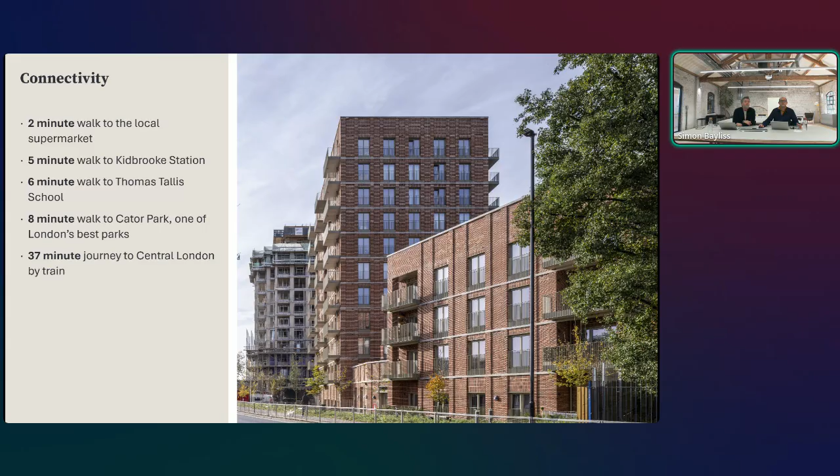So when all the phases of the first and second phase are complete, this will be a really thriving community in an amazing location — 2 minutes from the local supermarket down in Kidbrooke Village, 5 minutes across to Kidbrooke Station, a short walk to the local school, which is very well-regarded, and on the doorstep of Cator Park, an amazing project which itself won a Pineapple Award a few years ago, all within easy reach of central London.

We expect when that second phase, the south phase, is finished later this year, the road will be removed, that central space will be enlarged, and it will be a really thriving heart to the community. The residents have been there now for a little over a year — September '24, first residents moved in. We've done quite a lot of post-occupancy evaluation with and without the council.

Quite recently, the nursery has been finished. We've done some feedback with the nursery team recently and learned some valuable lessons around the relationship between the nursery and the blocks above, but it's a space that's working incredibly well. We think 60% of the kids are from the estate at the moment, with some from away from the development, and as the south phase comes forward we'll expect to see more residents from the estate.

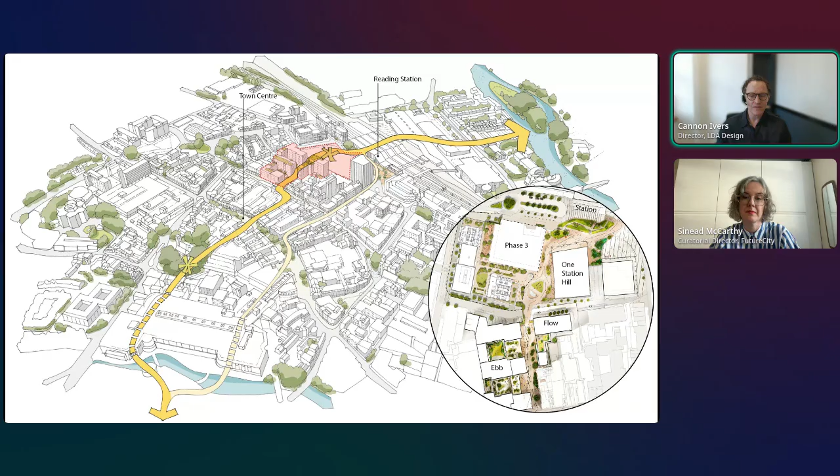The area has been undeveloped for 2 decades, with 3 different owners failing to deliver viable plans for redevelopment. In stark contrast to today, it was home to the derelict Friars Walk Shopping Centre, unoccupied since 2004, a 15-story 1970s office block disused for decades, a dilapidated multi-story concrete car park, and Reading's bus depot. There was no pedestrian link over Garrard Street, which you can now see centrally in this slide.

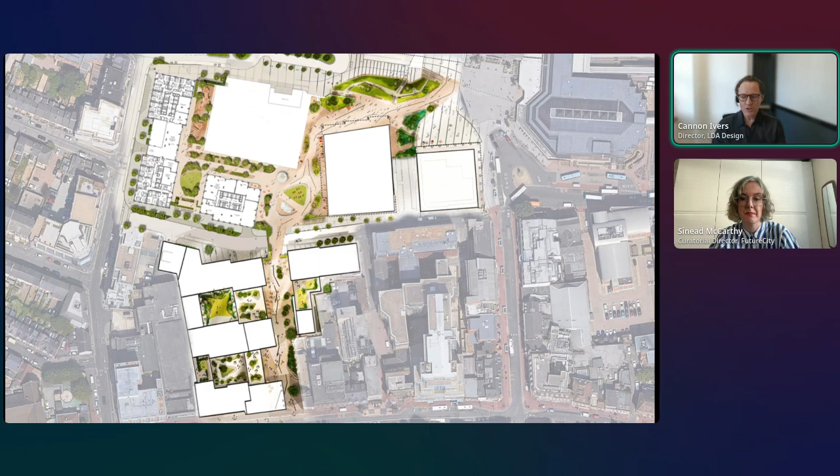So in essence, this project has completely transformed the arrival experience to Reading. People were once greeted by a stark multi-story car park and are now welcomed by trees, planting, public art, cafes, and shops.

Through creative placemaking, meaningful public engagement, and vibrant community partnerships, Station Hill has established what we call a 5th B: belonging. Throughout the development, the team worked closely with local groups and charities, hosted a Pathways to Property summer school, invited school children to create artwork for the site hoardings, welcomed students and graduates, and led regular tours and presentations for stakeholders and community leaders.

The public art strategy, titled Painting a Portrait of Reading, set out to celebrate the town's heritage while looking confidently to its creative future. Artists were invited to reflect local stories, pride, and shared identity, bringing communities together through ambitious cultural expression. Each artwork responds to its specific setting, framing the architecture and landscape in new ways. Commissioned with guidance from a strong public art advisory group made up of councillors, cultural organisations, and the design team, the works foster ownership, stewardship, and a lasting sense of belonging for everyone who lives, works, and visits Station Hill.

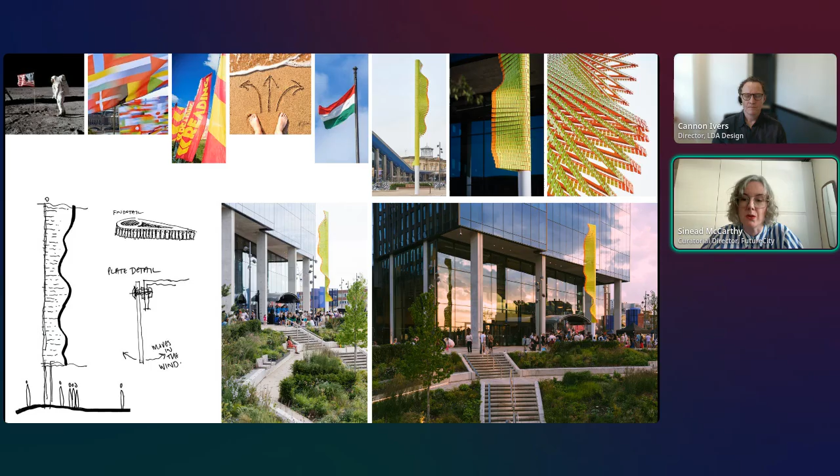It draws on research with Reading Museum, local archives and councillors, with community leaders also contributing, and the artists carefully selected stories and figures that shape the town's identity. Crucially, they worked with 24 schools, which was an amazing feat, and colleges across Reading, hosting workshops to hear directly from young people about the individuals and places that matter most to them. The result is an artwork made with and for Reading, celebrating its heritage, diversity, and shared sense of pride.

The next piece you can see here is called Pivotal, a monumental kinetic sculpture by artist and architecture duo Neon, representing a bold and creative new chapter for Reading. It's positioned prominently beside the station, greeting visitors on arrival and serving as a striking landmark and meeting point. It's inspired by the symbol of flags, an emblem of identity and community.

Pivotal reflects the idea that Reading's future will be shaped by the people who inhabit it today. Just as Station Hill has been designed to adapt and evolve with the city, the sculpture embodies movement and change. It's composed of 73 brightly coloured rotating fins, each with kinetic elements that respond to the wind. The artwork transforms moment to moment, and by night it's animated by lighting that brings a further layer of dynamism. Visible to millions of passengers each year, Pivotal stands as a beacon of adaptability, optimism, and collective belonging.

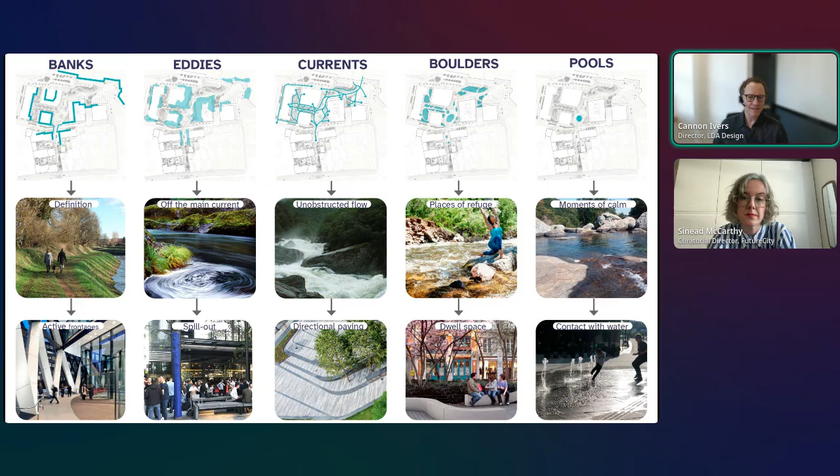Once the entire master plan is complete, it will deliver up to 1,200 homes, creating a vibrant community of more than 8,000 residents and employees. Phase 3 will provide 600 new homes and more than 1,000 square meters of retail and amenity space at the site, over 2,000 square meters of public realm, transformed streets, play area, immersive planting, and 50 trees.

Retail and leisure across Station Hill blends independent local operators like Siren Craft Brew, 1650 Coffee Company, and big name brands like Notes Coffee, and innovative leisure operators such as Flight Club and golf rooms.

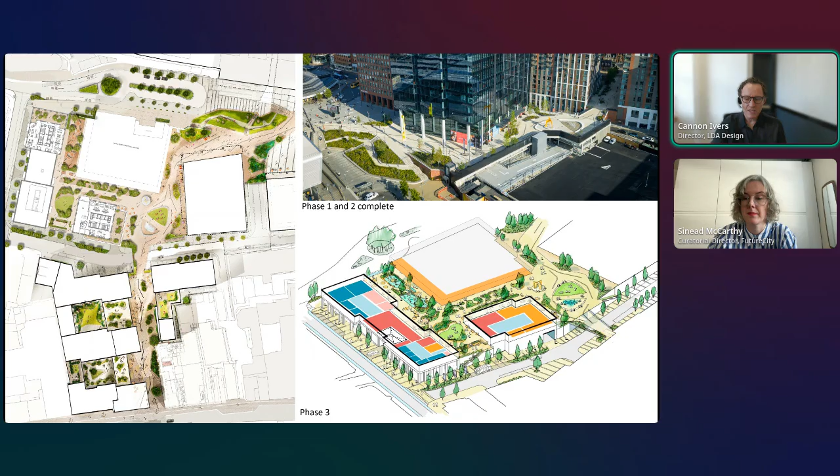Nearly 6,000 square meters of public realm with a variety of character areas has already been delivered, including a playful water feature, over 1,000 square meters of planting, and 58 trees. A site-specific and Reading-inspired public art trail strengthens the sense of place and creates an inspiring route for people moving through Station Hill to the station and town center.

The project has successfully established community events and initiatives, such as the Farmers Market at Ebb and Flow, and 7,000 people at the Party on the Hill event, which showcased local talent, businesses, and restaurants.

Sustainability is at the heart of Station Hill. One Station Hill is an all-electric building using air source heat pumps and targeting a BREEAM Outstanding certificate and EPC A rating. In addition, Ebb and Flow was the first residential development in England to achieve an ActiveScore Platinum certification, demonstrating commitment to sustainable modes of transport.

We got a couple of seconds left, or are we done? That's your time up, I'm afraid. Okay. Welcome to Station Hill.